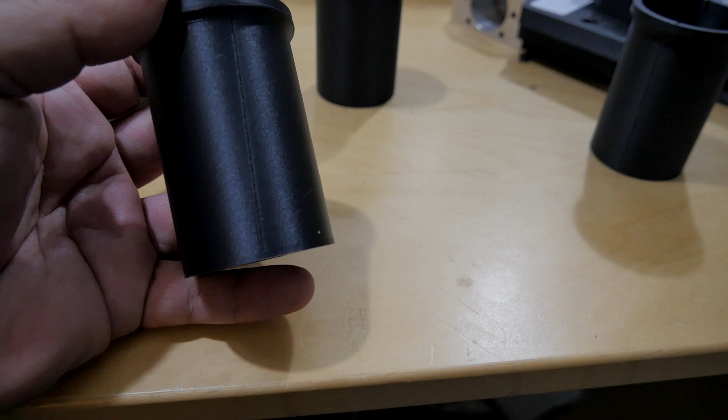of these seams. And you can see the seam, how pronounced it is, especially if you get it in the right light. And I'll just rotate it around so you can see it there, even on these black pieces. And that's on the inner seam also with this. Yep, there it is. Can you see that? If you get the light right on it.

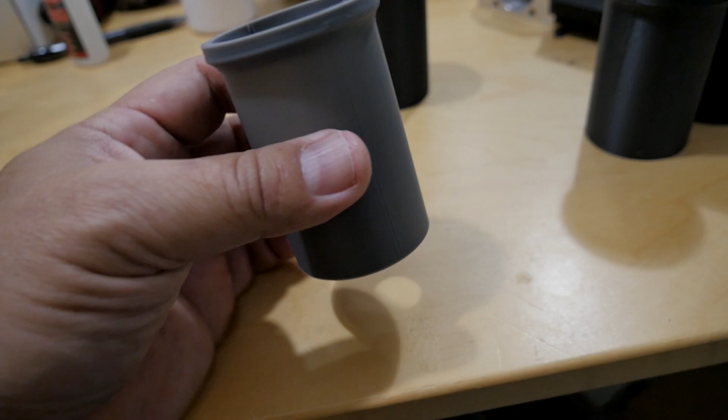So it's really pronounced, and you can get this even on some flat surfaces, and it's where the layer transitions as it keeps going up and up to the next layer. And I've tried other settings to try to reduce it or deal with it. And one of the main ones I used to try, the seam position right here, where it says aligned, which is what we just looked at.

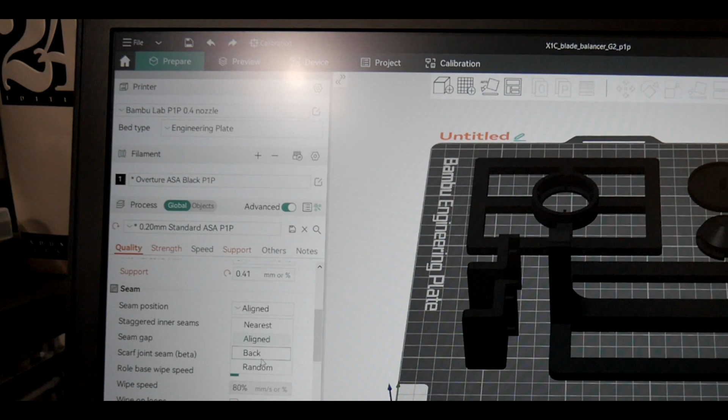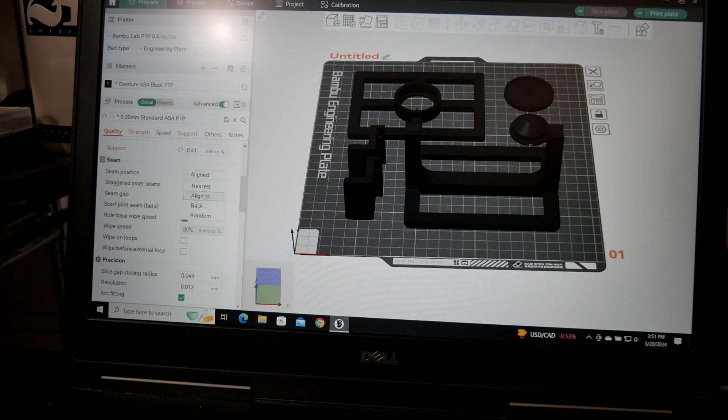There's random, so it'll start the next layer at just random spots instead of just being all on one alignment. And I haven't had too good luck with that. When I'm looking at the random, it just scatters them all over the place. And while it doesn't have that pronounced seam, it just looks like there's random artifacts just splashed around on the part, and I think it does more harm than good, you know what I mean?

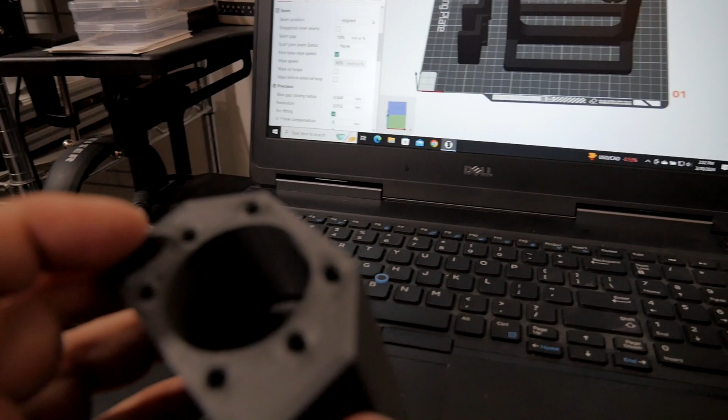And the nearest, we can try to align it, and I've done that a lot too. Say if it's on an inner surface somewhere and you try to hide it where there's a seam or a corner, you can do it that way. But overall, I always end up with a big seam like that.

And in another instance, I was getting blobs coming out of where the seams are supposed to be. One here and one up here on this inner part of this ring. Now this was kind of special because you can see how soft this is. It's a real soft filament, almost like a TPU. And where the seam was, it was just leaving blobs, right?

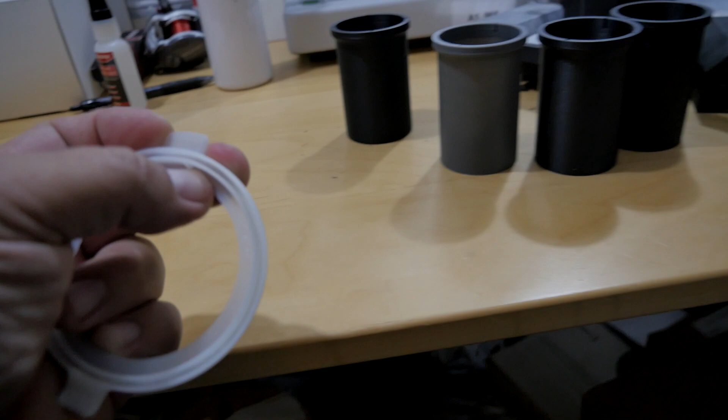So I treated it like a Bowden tube, because I was printing these off on the Bambu Lab P1S. All the P1 and the X1 series, they're more of a direct drive. And I just treated it like a Bowden tube and looked at the settings. For the filament here, the settings where it's on setting overrides, when you take a look at the retraction length, you enable it, and instead of 0.8, I went up to 3, like that.

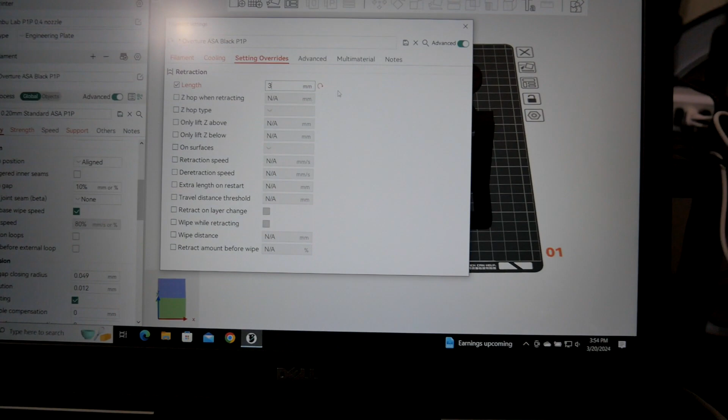And that seemed to work. You can see these are two identical pieces. Now, if I rub my finger across it, I can feel the seam, but you can't see it. You can't see that big blob that was leaving there. So this was a really, really soft filament, and I had to do a filament retraction to get rid of those blobs. But I'm sure if this was a taller wall, you'd still see the seam, right? So I definitely wanted to try that scarf seam and see if that would do the job.

So I was watching some YouTube videos, and that's when I saw this one from Teaching Tech, and he was pointing everybody over to this Printables page, the Scarf Seams Guide, and it's a pretty good video. You might want to watch it too. He went through much more details, different scenarios, using these test files.

But you can take a look at this, and it gives a good description. Gives a lot of info here, all the updates while they were developing the scarf seam. There's the overview, different requirements. It's a pretty nice guide, right? And I used this to set the settings on Orca Slicer. Mainly these here. You can see optimal speeds.

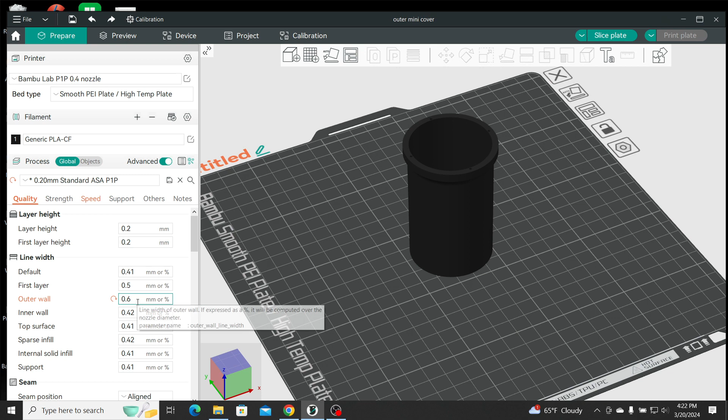The quality, so the outer wall width, you can see it's 0.6. It was quite a change. It's going from what, 0.41 or 0.42? Yep, 0.41 up to 0.6. But I think I had tried 0.6, and I also tried 0.5, and didn't see any appreciable difference, but you might get different results, right? So everything's aligned. The seam gap, that's pretty much standard.

The scarf joint, we want the contour and hole. Conditional scarf joint. I left these angles, scarf speed the same, the scarf joint speed, because I had already slowed the outer wall down to 75, so that's going to be basically 75, right? So I didn't change that at all. The height at 0, the start height.

Scarf around the entire wall. Since it's a tube, I want to make sure it's all covered. The scarf length, I just left that at 20 millimeters. Scarf steps at 10. Scarf joint for inner walls. And it seems almost redundant, that you're going to do this contour and the hole, because that's actually just an inner wall, right? But you might use it, say, if you have some clearance holes through the part, and you want to cover that too. But this one, just to make sure, it's going to cover that whole inner wall.

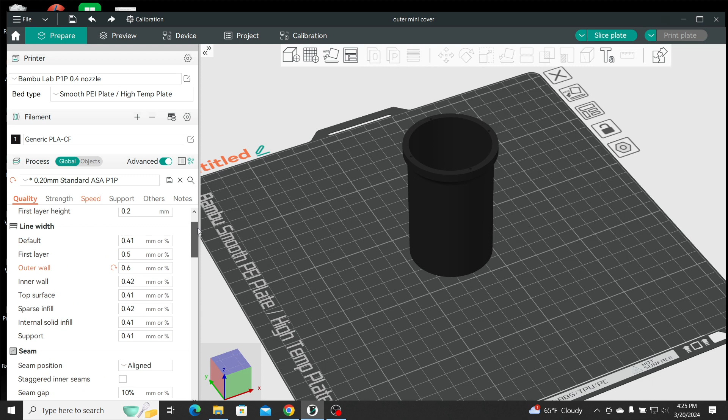Role based wipe speed, that's on. Let's see what else. I think that was it. Oh, here we go. The wall printing order, you want to set it to inner, outer, inner. And that is how I set mine up, pretty much just going by what they showed on the Printables example. So let's slice it and see how it looks.

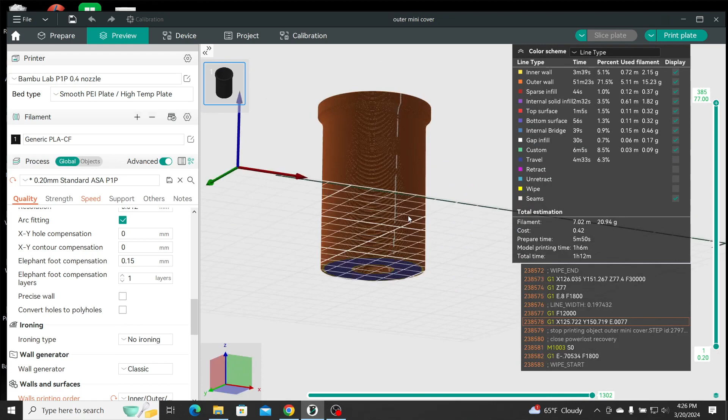And you can see where the seam would actually first show up without all these changes. Now this is kind of strange. I hadn't seen this before, but you can see for some reason on this little part of the tube, this band right here, it's putting the seam on the other side. And same down here on just spots. Why it did that, I don't know. I had never seen that before, but that's how I printed it. So, well, let's take a look.

Yeah, so remember, this is out of this gray PLA, just standard PLA, and there's the seam. Same thing with, I believe this was PLA carbon fiber, and this was just a matte black PLA. But you can see the seams on all of them, and especially even on the inside there. Lighting's probably not optimum for that, but you can see them there for sure. And here is the print. So let's take a close look at it.

Now I'm just slowly rotating it so you can see the entire tube. You can see it did a pretty darn good job of hiding the seam. If you look hard enough, like right there, can you see that? If you get it in the right light, you can see the joint, but I can't feel it. When I'm rubbing my finger over it, I don't feel the seam, but when you're really looking hard, it's there. Same thing on the inside. I can see it in the right light, but I cannot feel it. Yeah, I thought it turned out fantastic.